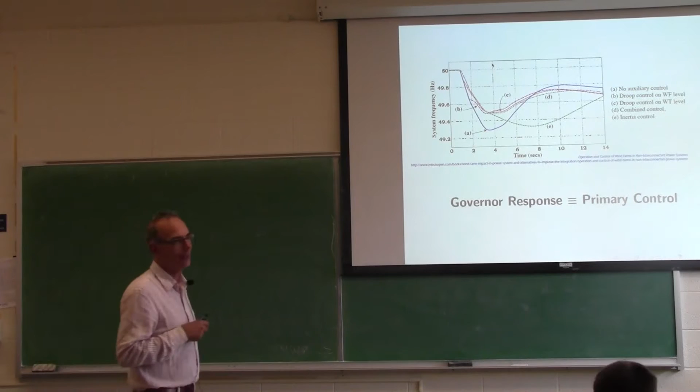Just a little bit about the need for secondary control, to motivate the lectures that come. This is something I thought about before and didn't explain, so I went back to look at it, and it's a good thing. There's no easy way to explain this, because it's a particular paper on how to deal with wind farms.

Everyone says because of a lack of inertia, which gives you that M we've been talking about, I'll review that in a moment, when you have a lot of wind and solar, you have a lot more swings in frequency when there's a disaster.

So these are simulations where there's a generator outage at a certain time, and with different control techniques you get different swings in frequency. Without any auxiliary control, you'll get one particular swing, and with their synthetic droop at the wind turbine level or the wind farm level, they brag about how they can reduce that swing downwards. And I'm sure they can do a good job with that.

You need some sort of way, you need actuation to do it. With a governor, you know what it is, you can turn a valve and supply more or less mechanical power. With a wind farm, there's no valve. So what do you do? Over the next month we'll try to problem solve that question: what do you do when you don't have a resource like a valve you can turn?

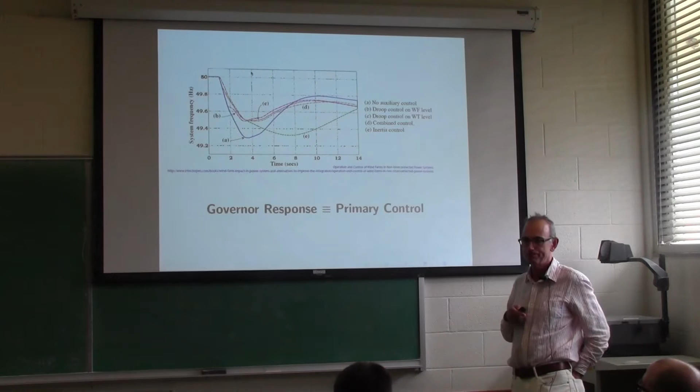So I've given you, I don't know why I'm repeating this, but when we came up with our power grid model last time, we're ignoring the huge transmission dynamics and losses and all of that. And we ignored the fact that there are some gigantic regions like the entire Northeast, and much smaller regions like ERCOT, which is islanded completely, a Texas thing.

Texas is one interconnected system. Interesting, Quebec is like Texas, it's islanded itself off from the rest of the world, although there are DC tie lines and all.

But this is what we've been talking about in the last lecture, that each generator works together, looks at local measurements to stabilize the grid. So you've got this distributed control problem. And as I've said, there's no science for that. You can't pick up a book on distributed control and learn anything, because there are no results.

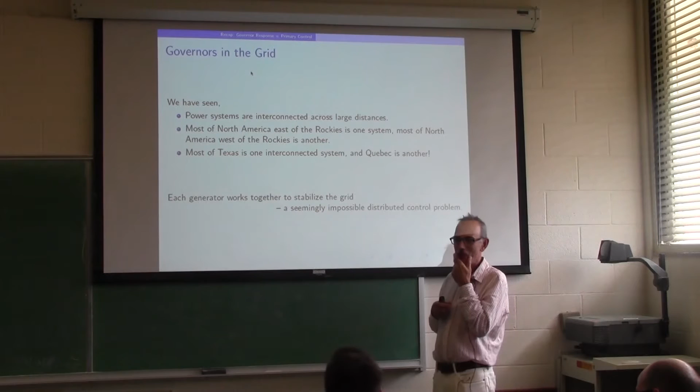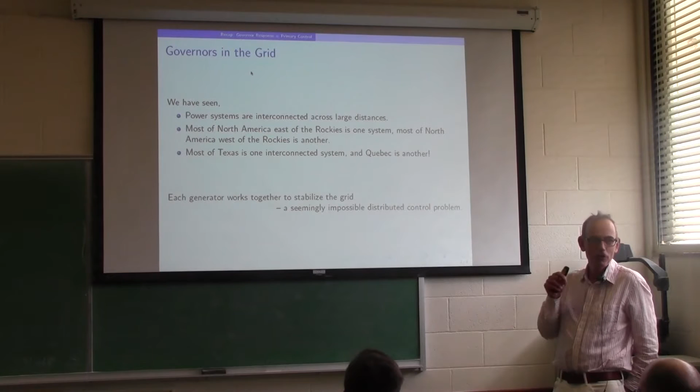There's nothing, just a bunch of counterexamples, a bunch of results saying you can't optimize. The complexity of computing an optimal solution based on distributed architecture is exponential, things like that, or NP complete. But there's no theory at all. So that's what's really cool: just by trial and error and monkeying around, power engineers have come up with this incredibly robust architecture, and we're just starting to see some explanations of why it works.

NERC demands, I saw, they've even made a bigger alert this year. Last year they were screaming about no more than 6%, 5% is good. They're worried about this because the dynamics of the grid depend on that. This is not because of steady state analysis, it's because it's this distributed control problem, and they're scared because we don't have any theory for this. You can see bad things happen and say our droop gains are too big or too small.

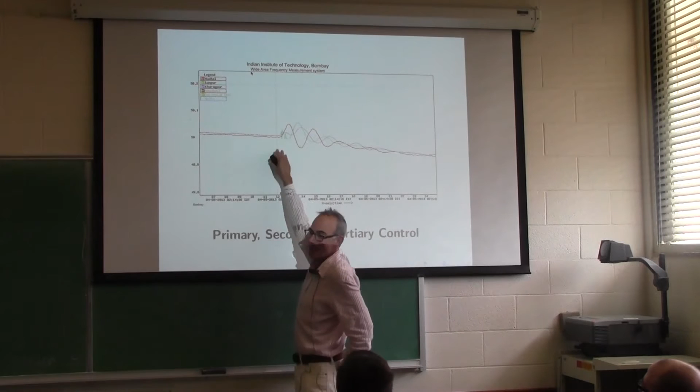Okay, so what we end up with is, first of all, we're going to keep talking about primary control a bit longer, we're almost done with that. And primary control is all about the beginning, trying to avoid crazy swings like this in frequency.

So this is it. India has the best plots because it's allowed to be more relaxed, the frequencies vary more. There's also a wonderful resource you can find on the website. IIT Bombay has all sorts of beautiful plots of disasters, just wonderful plots which are hard to find in other parts of the world. They happen everywhere, but India is very nice about sharing it. IIT Bombay is the best power group in the country, in the world. In India for sure, and in the world.

In terms of people hours, they have incredible people working on and who really care about that $500 billion. Did I mention this in the lecture? India, Arun's lecture, Arun Majumdar's lecture, he mentioned that India wants to spend $500 billion on renewable energy, and IIT Bombay is going to get a good percentage of that money, I'm sure, for research. So they're building big indigenous solar power plants so they can avoid buying solar panels from China, things like that.

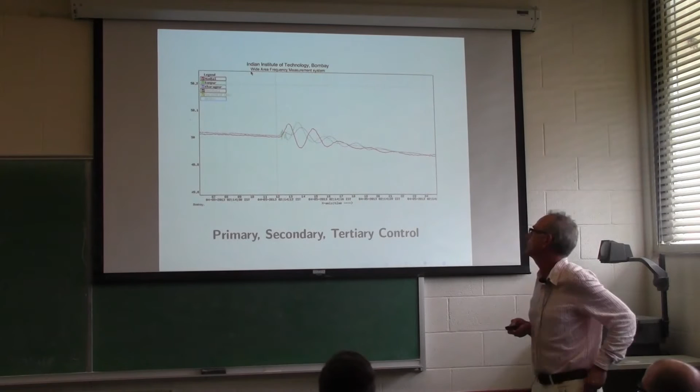So anyway, this is just the kind of things you see. This is sort of, again from India, where you see some crazy deviations in frequency - that might be measurement error - and the frequency going downwards, this is the kind of thing you'd expect from just primary control. Because remember, the steady state analysis said that with just primary control, if there's an increase in load or a drop in generation - say from a generator dropping out - the frequency will reach some steady state, and it'll be some new value.

So if you lose a generator, the frequency will converge to some steady state. This is the reason you need secondary control. But the fact that you don't get restored to the nominal frequency - in this case, well this is not 50 hertz - eventually 50 hertz is because this is before the secondary control kicks in.

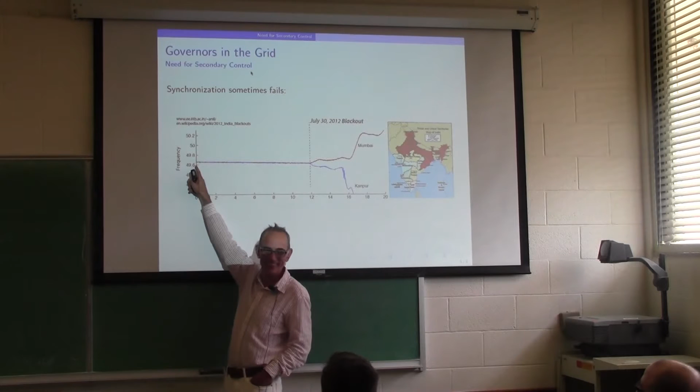And when things don't go right, when the governors aren't working at all, you get a blackout. And this is an example, just fantastic. And look what they accept as nominal - it's amazing, I mean it's usually 50 hertz, but it's amazing how robust it is compared to the US.

Okay, so we need responsive regulation. And again, given the state-of-the-art of distributed control, there's no science for it at all. It's a miracle, and I'm going to explain to you how it's not that surprising. Basically, the way this has been designed makes it easy to analyze. So there's no theory for, say, optimal distributed control, but the hack that power systems engineers came up with makes it easy to analyze. That's what's beautiful, and that's what you have to do. You've got such a complex system, you have to design it so it's analyzable. That's sort of a mantra, I think, in complex systems.

And that's what's happened in communication systems. At first sight it's insanely complex, but TCP/IP is this distributed protocol that makes it analyzable. It has no optimality features, it's a hack, and it makes a really complex system simple, at least in behavior.

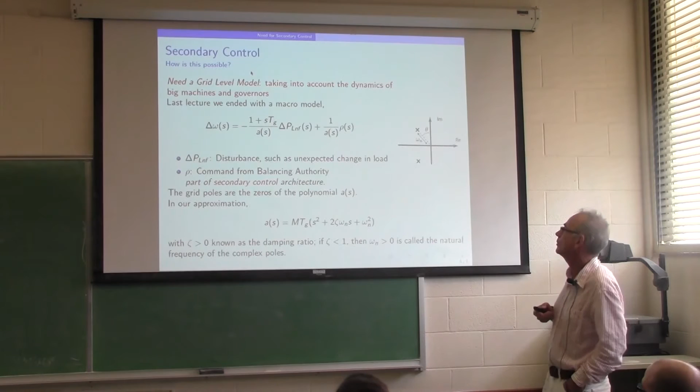So here's where we were last time. So now the equations come in.

So let's go through this a little more slowly. In terms of secondary control, restoring frequency to its nominal behavior, and using all the resources available - supercapacitors, batteries, demand response ideas we'll be developing, generators - in order to get any insight in grid level control, you need a macro model.

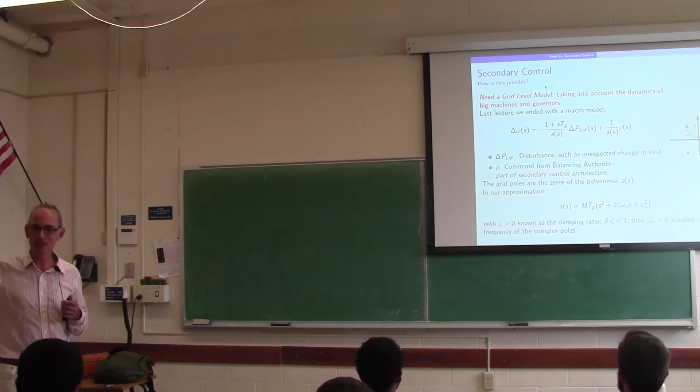That's why I started to. I was just giving you a plausibility argument in the last lectures, and this was the formula we came up to just as people were starting to push in and try to kick us out of the room. I won't derive this again, but go back, you've got the notes. I uploaded them online, and there was a transfer function here in terms of this ugly thing, which was the non-frequency sensitive load change in load.

So if that goes up, then there's a power mismatch. If it suddenly went up - more typically this represents a drop in load, or generation. The generator goes out, it's just like load going up. That's why there's a minus sign there.

And we found there's a zero in the transfer function from here to here. That's always going to happen, and not here. And I wrote 1 there - I guess that's a typo. I think I had a constant there, an M. I called it M last time, so that's a typo, I'll try to remember to correct that.

And A of S, in the end, I came up with a hack for that. I pretended it was second order, which is a reasonable approximation. We'll see. The beautiful thing is that's the Laplace transform of the signal that's sent by the balancing authority.

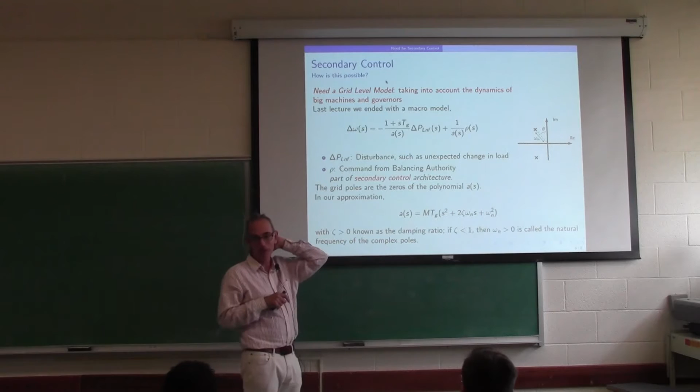PJM or Florida Power and Light or whoever, GRU, is going to send that signal to every generator, maybe scaled depending on each generator, and that's an input that's going to change their mechanical power, and thereby - that's broadcast to everybody - changes the grid frequency, right?

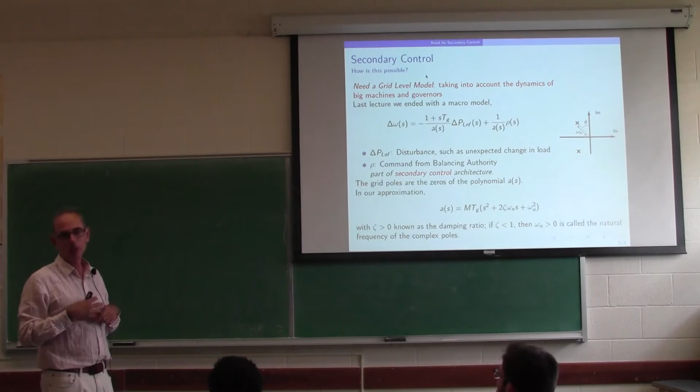Now that's the major architecture of the secondary control that we'll be talking about. The grid operator can play God and send a signal to all the generators. They're all doing their little thing, looking at the local frequency, but they're also looking at that signal which is sent from 1,000 miles away maybe, manipulating the behavior as well, but on a slower time scale - not in the order of seconds like primary control, on the order of minutes. So we'll have fun with this.

Again, so I argued that there were approximately this - if you take another course, you'll see there's pretty good arguments that you can approximate by a second-order polynomial. So that's a second-order transfer function, so there are 2 poles. And the approximation gave this, where TG was an approximation for a first-order term, and M was the sum of all the inertia constants.

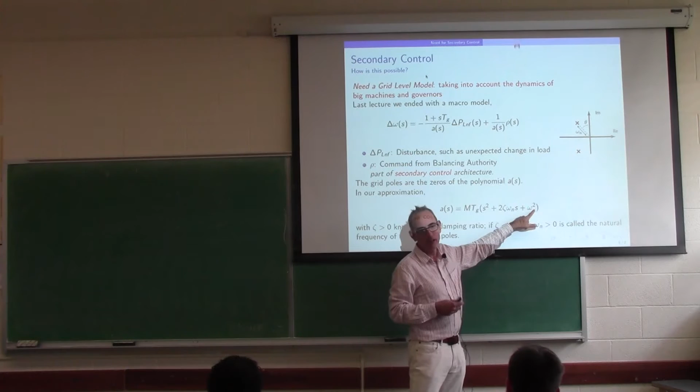This is what you learn in a control course, this representation - a way of describing a second-order polynomial. So this zeta term that appears here is called the damping ratio, and it's only if zeta is less than 1 that this term is important here. That has meaning, and then it's called the natural frequency, and I'll explain where that comes about. We really need to understand that, it's helpful. I'll explain it before we get to control.

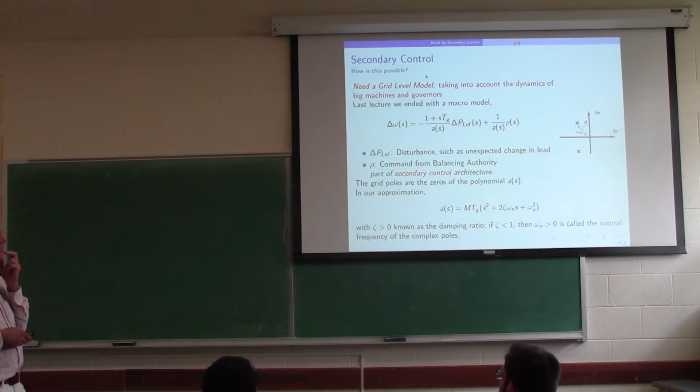Any questions? Was that all clear? Like I said, it was the most boring lecture ever, but we need it.

Last lecture, so there it is. Just tearing this apart again - if you go back, you can work these out. I gave you a formula for omega n squared, I gave you the 2 zeta omega n. They're in your notes, and they're horrible expressions.

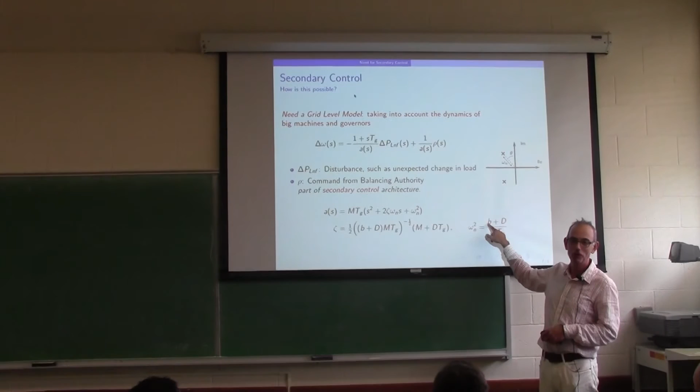And the omega n squared part is this times this - it's actually just B plus D. And if you recall, B was the summation of 1 over Ri, where Ri were those droop parameters. And there's the natural frequency. That's where we're going to see, when zeta is less than 1, that's when you expect to have big overshoots. So you might think that's what's going on.

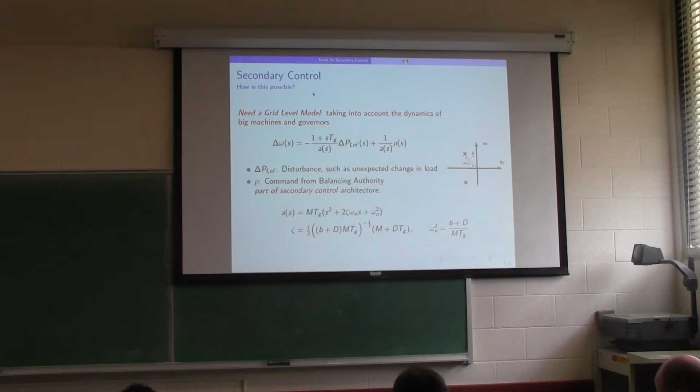Where am I? Yeah, I'll get back to that.

So let me explain this diagram. In the case where zeta is less than 1, this is what the two poles look like. They're complex. So that's why zeta less than 1 is important.

Everything has to be positive for the poles to be in the left half plane, which is necessary for stability. Even if you know nothing else, you need poles in the left half plane for stability—bounded input, bounded output stability. You better remember that. But zeta less than 1 is when you get complex poles.

And you have this nice interpretation that omega n is the distance of that pole to the origin, and zeta is equal to the sine of theta.

So if that angle is 0, that's when zeta is 0. And that's bad news—you get a pair of poles on the imaginary axis, and that's not stable. So zeta equal to 0 means a step response would result in oscillatory behavior forever. So you don't want zeta too small.

If zeta is very small, it's almost like you have a pole on the imaginary axis, and so a little jolt will cause big oscillations. These big swings in frequency would be a cause of zeta being close to 0 or something—it's not, I'll explain that in a minute. There's big overshoot, but it's not because zeta is small.

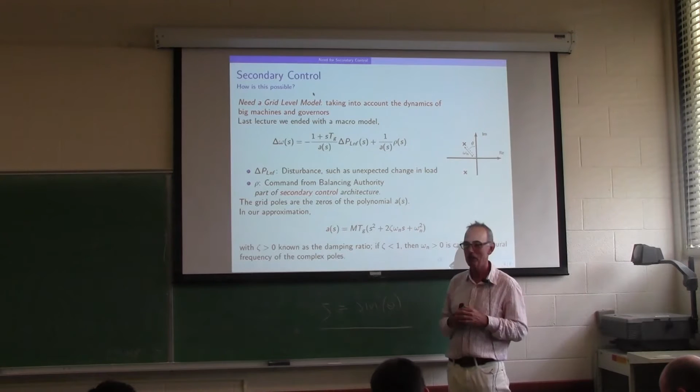All right, well, let's keep going. So here's what happens in real life. This is a simulation, but it's a really high fidelity simulation of what happens in real life.

So the WECC, the Western Energy, blah blah blah, I don't remember, doesn't matter, don't look it up. But anyway, it's a simulation of Western US. It's an example again of what happens when you have a lot of wind generation and low inertia or not, and you get different swings in frequency, not that different, depending on the mix of wind generation and traditional generation.

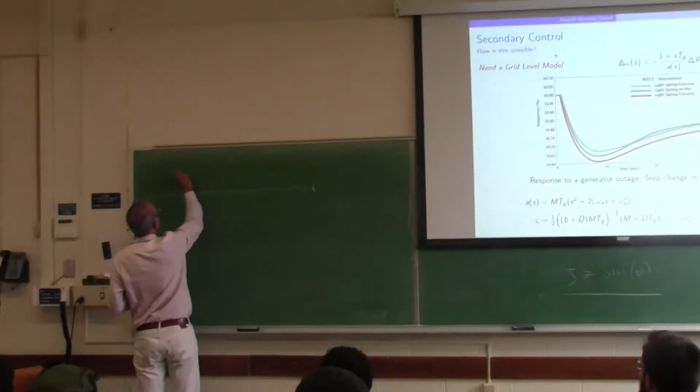Now, what's happening in this plot? Again, this awful notation, non-frequency sensitive load, which could also just be a generation outage—so it's either a load that's not frequency sensitive or a generation event. It goes along, and at time T naught, it dropped—

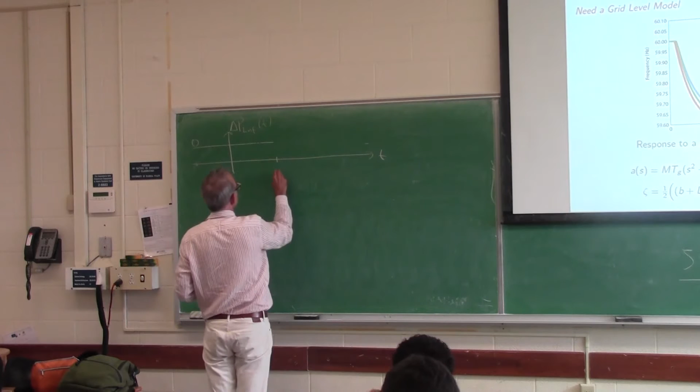Oh no, it jumped up—that's right, a generator dropped, which is equivalent to virtual load increasing. All right, so that's called a step input.

Now, we know that the transfer function from that signal to deviation in frequency—ignore that for a moment, because that's going to be at a much slower time scale—has a minus sign in front.

So basically if you look at delta omega of t, which is at 0—so that's not showing delta omega, that's showing omega itself. So subtract off 60 and you'll start off at 0. And what you're seeing is that at this point, first of all, do you notice the corner?

That's indicative of a zero. It's perfectly consistent with a second order system that has one zero and two poles. Exactly what you'd expect—it means relative degree 1.

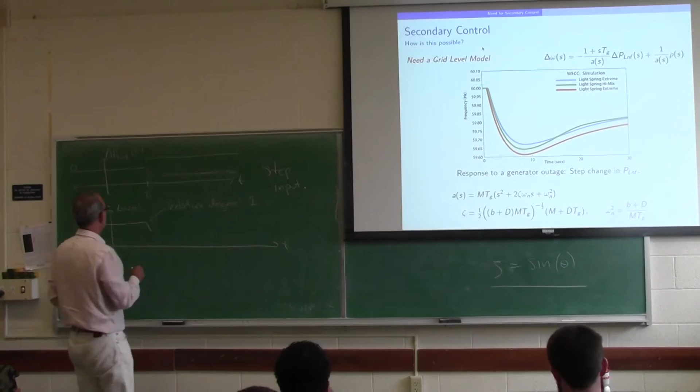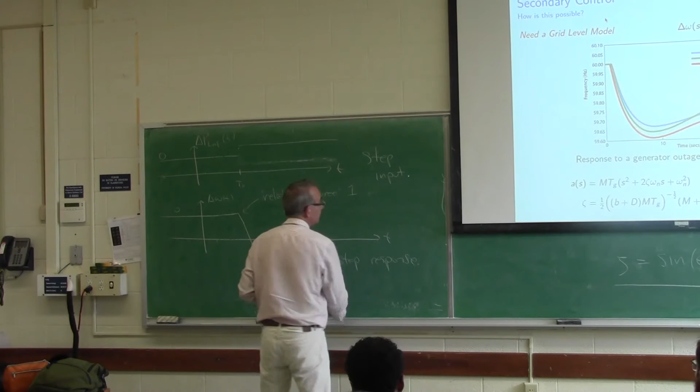Now step responses usually go up, but it goes down because of the minus sign. So this is a negative step response—negative, again, there's a minus sign there. So that's a transfer function.

That's it. So that's what's really cool—generators go out all the time, so we get to observe step responses all the time. And any control engineer looks at that and says, that's a second order system, I can fit a second order model to this. And for control design, it's perfect.

There's a typo in that. Oh, is there? Oh, that's right. Yeah, we'll talk about that later. There's a typo here, yeah, that's right. Anyway, I'll broadcast a correction later, it's no big deal.

So anyway, this is a high fidelity simulation of the Western U.S. You can see the same thing happening from real life—I've shown you a million examples of this from real life. And here's an example from a professor in Texas, Ross Baldick, who's a friend, the main guy for power in Texas, really, who did basically what we did. He computed this, as a lot of people have—this is an old thing to do.

And by the way, I've left things out. The big spinning machines aren't just generators. There are loads that are big spinning machines too, so you have to throw those in as well.

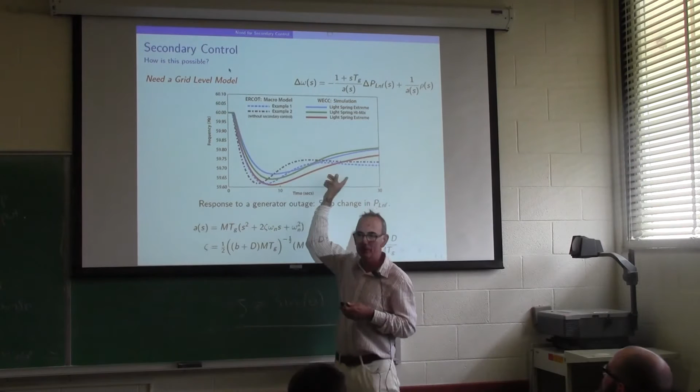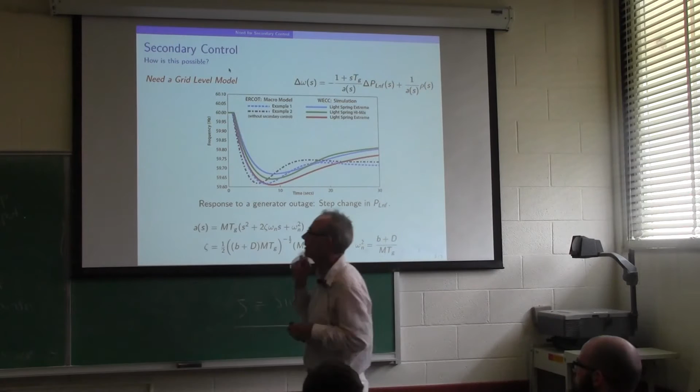Well yeah, we know that, right? We know that the steady state is - so delta omega infinity, the steady state, you have a formula, right? It's equal to minus delta P, L, F infinity divided by, do you remember? It was D plus the sum of one over R. Yeah, I think that's the formula, and that's what we got.

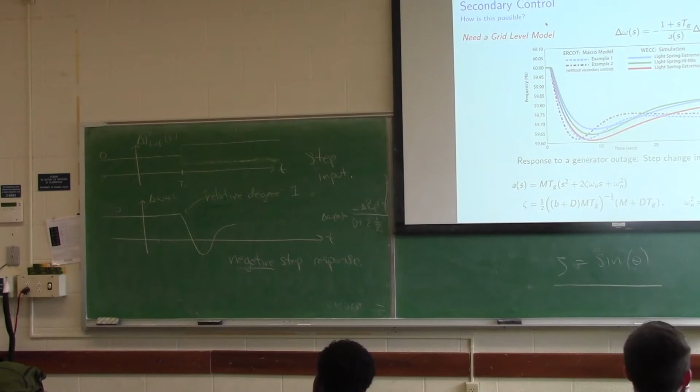So the larger this is, the more it'll sink, and that's scary. So you lose like a 1 gigawatt plant, or the 2 gigawatt plant that we saw in it was Indiana. Holy shit! That's amazing. That's 5% of the load in the Midwest.

So, all right, cool. So anyway, the thing is, it matches reality. I know these are both simulations, but you've seen real plots as well. It looks like a step response. So we're in good shape. And so this is what the grid operator needs.

So if you know anything about control, if you're going to build a flight control system for an airplane, and somebody gave you a model they used for simulation, you would laugh in their faces. It would be so complex - a partial differential equation of 50th order in 100 dimensions. And you'd say, what the hell am I going to do with that? What you do for control design is you say, give me a second order model. I don't mind if it's 10 dimensions, but give me something simple. I can design a control system based on the simple model, and then you can do numerical experiments on your fancy PDE simulator. You can't do design based on a complex model.

And that's the hardest sell of this field. People will not accept that. People who don't know about control theory, you go and try to talk to them about that - I need a simple model for design - they won't let you talk to them. It's so frustrating, in so many different fields. They don't understand the abstraction, that you need a simplified caricature of reality to get insight and get initial control strategies.

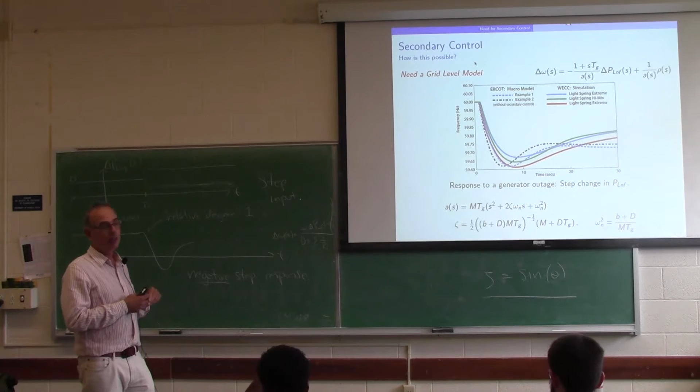And later on, when you do the simulation, sometimes you find issues, like in Droop, this weird deadband. So you actually don't do anything with Droop, really, until the frequency gets out of a deadband. It's not really linear - you only kick in that integral control when the frequency goes out of some small deadband. And I guess there was some chattering that they saw, and so they put in the deadband to resolve that. And you wouldn't get that from this model - you need to go and get a high fidelity simulator to do that.

All right, okay, so this is how you would do a design. And the thing is, for secondary control, the dynamics are so simple, you can get away with murder, I really believe. I think people talk about much slower time scales - I don't think the dynamic issues are as critical as they are in these time scales of seconds, where you can just blow up like that in a few seconds. But on the order of minutes, I think really simple models can be used.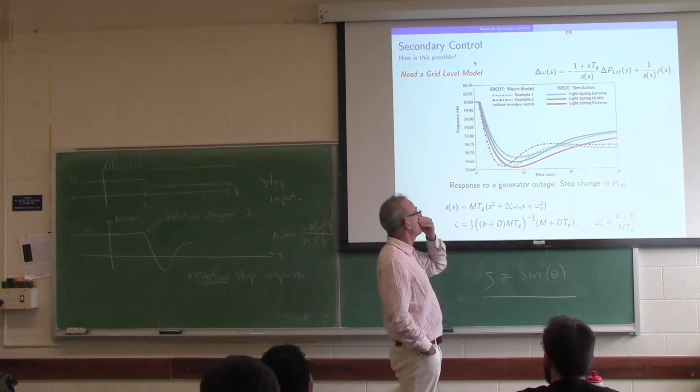It's my conjecture, okay? I might be proven wrong someday, but most people in the power systems community agree with that. Who knows what's going to happen when we make so many changes to the grid? I have intuition from reading books and seeing plots like this based on the current grid. What if we got rid of every traditional generator? We don't know. So I could have false intuition, but if we don't make major changes, what I'm saying I'm sure is true.

All right, what's next? First of all, let me explain this. I'm going to kill this now. Any questions on this?

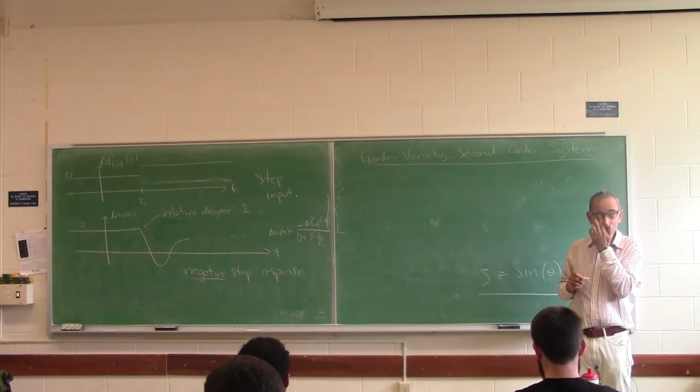Okay, so it might be ambitious, but I want to do a few things today. First I want to just explain to you about dynamics of simple models, just to get some insight. And then I think I can do it. I think in 1 hour I can teach you everything you want to know about classical control. And if I'm wrong, we'll go a little longer. But I think the main idea is you can explain really clearly in 45 minutes.

So that's a normalized transfer function like this. So no zeros, and I've made a change here. I've made a normalization. And why would I put this funny number on the top?

Any guess? Constant m? Well, not m, but there was some funny number here before. I had a b, which I could write down. Before, it had nothing to do with this. They weren't related in any way.

The reason for this is, note when I put an s equals 0, I get 1. So there's a DC gain of 1. So it's just a normalization so that if you put in a step input, the steady state will be 1. Okay? So if you look at H and you have some input-output behavior like this, I'm going to keep that in there.

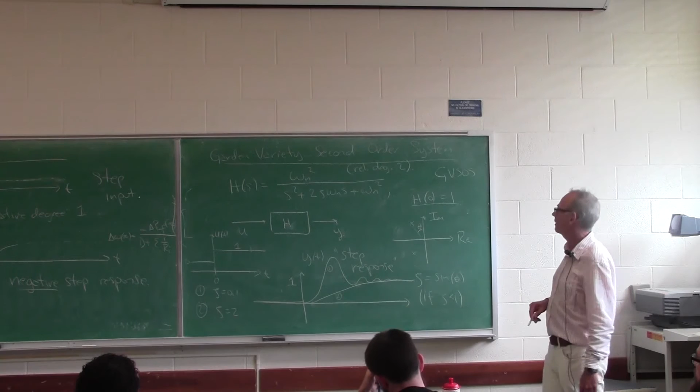And again, if I don't have room to put it in, but if zeta was 0, it would do this, and it would just be a sine wave eventually. It would converge to a sinusoidal behavior if zeta was 0. If zeta was 0, you'd have poles there and there. So it would just be like a perfect slinky. Pump it, a frictionless slinky. Just hold it and boing, give it a little kick, and it goes boing its natural frequency forever.

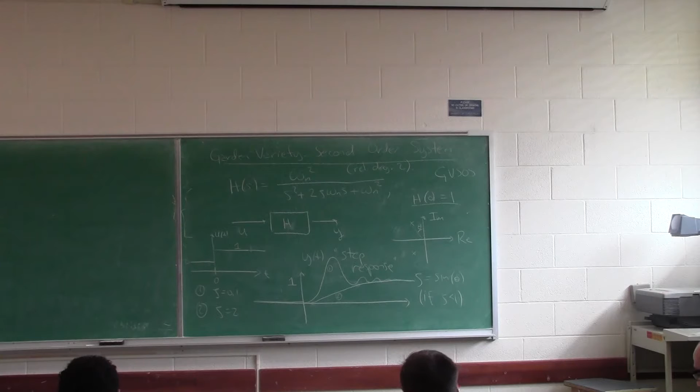All right, so why do we see this here? So that's the case of no zeros. What if we had zeros? Let's give it another name. Let's call it G of S. I don't know.

Okay, so we found that when we got the response from disturbance to frequency deviation, we had this behavior. We had a constant here which was positive, which means we have a zero in the left half plane. Okay, so now we've got exactly the same picture, but we plug in a zero.

When you look at it like that, you say, what the hell can I say? You could say some things. I mean, if tau is very, very small, you can imagine it's almost like that's not there, but way out in infinity, it's sort of like not there. But if tau is big, that means the zero is more close to where all the other action is. Then that's very different. But let's give this a different name.

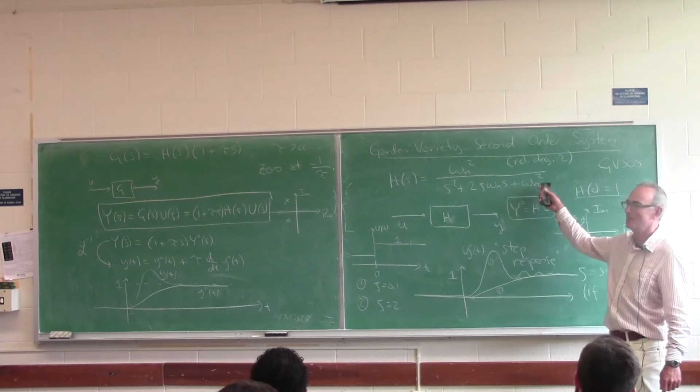So that would be the first two weeks of a first year control course. They spent a lot of time giving examples of DC motors and playing around with dynamics, and you'd look at other state space models based on this, things like that.

In terms of equation, what is y naught of t? Oh no, nothing, I mean right there. I'm just saying, suppose we first start off with a system, the differential equation. I mean, we know that, right?

Oops. Yeah. Oh, that's right.

Okay, so if I unravel that equation, I'll get that equation, because this equation is exactly the same as what we had before. Right, and so then you go through and you again do the same thing. You take inverse Laplace transforms, and you get y double dot plus 2 zeta omega n y dot plus omega n squared y equals omega n squared times u plus tau times u dot.

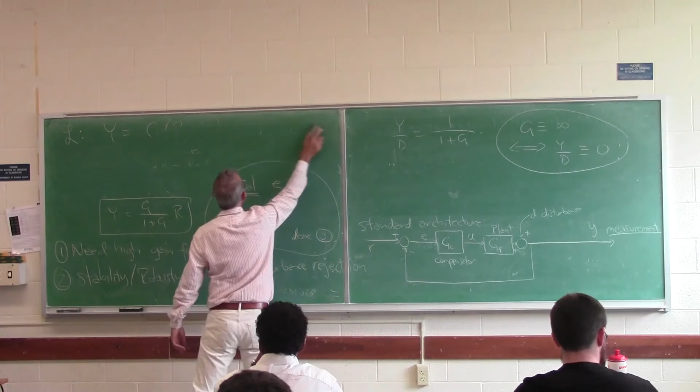So to achieve these two goals, you can't achieve this—you have to relax your goal. These are now two goals: we want tracking and disturbance rejection, and we want stability and robustness. To achieve this, we have to relax what we mean and just say, in some frequency range, we want really good tracking. So this relaxes our goals.

So like we have this transfer function—I'm sorry, I'm going to have to write Bode plots. All right, so E was, remember, E was R minus Y.

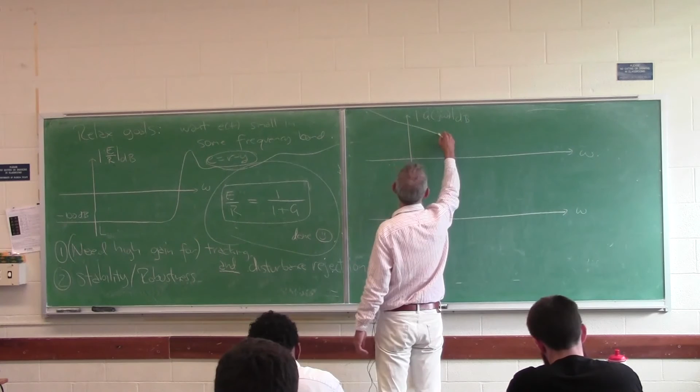Typically you won't see this because it would mean you have a big static value constant for a long time, which isn't what you typically see in practice. What we typically see is huge values at low frequencies, and then maybe something funky happens where it flattens out, goes down, and maybe goes down really fast. That's a magnitude plot in dBs.

Now the phase is important. I'll show you what typically happens: you'll have phase equal to minus 90 degrees here. We'll see that's what happens in almost every application where regulation is the goal. And then it typically decays. Now this is a bit scary.

This is a really scary system, where the phase goes like this. In real life, you can't measure things like this because the magnitude here is already 10 to the minus 10. I challenge you to look at a sine wave with magnitude 10 to the minus 10, when it's normally magnitude 1, and measure its phase. So these things, this is not even measurable, so it's not even reality.

But let's say that's minus 90. Let's say that this is minus 180. And let's pick some other stipulations. Let's put a number here.

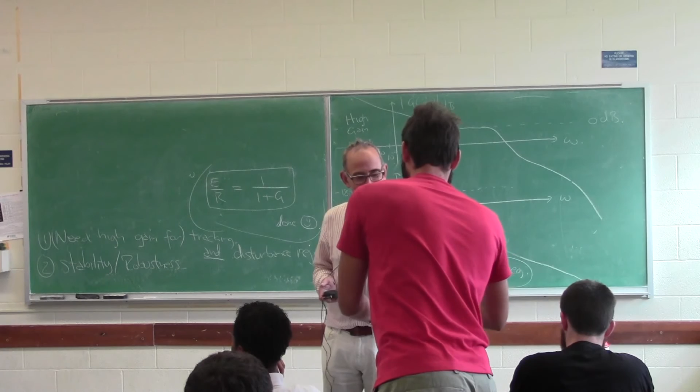It really is, it's flashing. All right, so we got some life here. Okay.

So the danger is that it looks like maybe there's a pole at j omega naught, you know. It's possible because 1 plus a negative number can potentially be 0, and that's a pole. So the only way—a pole means that g is minus 1. Right? And so g could be minus 1. And there's the red flag.

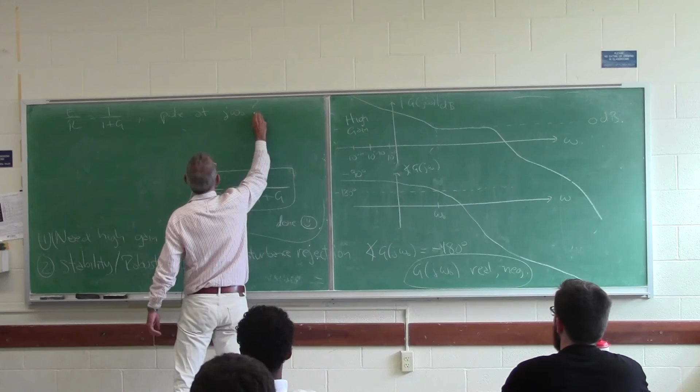I mean, it's hard to see here. It looks like we just missed it, you know, but we don't know. We came up with this transfer function based on the arguments I gave in lecture, and then based on some least squares. So the magnitude, the question mark there, and the answer is yes, if the magnitude of g of j omega naught in dBs equals 0, because that's a log in dB, so being 0 is the same as unity. And it's not, but according to this plot, it looks like it could be very small.

That's called the gain margin. And basically, if that's very, very small, then a very small bit of modeling error, and you actually have a pole on the imaginary axis. Move it a little more, you're going to get poles in the right half plane. You'll have instability. This is a really big concept—this is a central concept of classical control.

It's for understanding that boundary, see? Why are we obsessed with the imaginary axis? Because poles in the left half plane are stable. One pole in the right half plane, it's unstable. This is the wall between stable and unstable. And so you want to protect that wall, you want to build that wall and protect it. I'm not quoting Donald Trump.

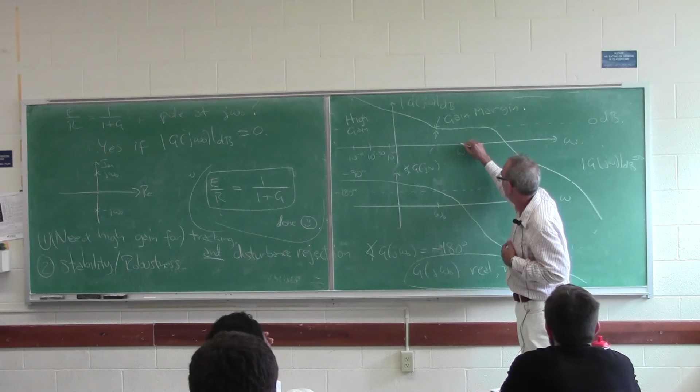All right, so that's called the gain margin. The other thing is called the phase margin. You go back here, let's call it omega 1. So we go way over here at omega 1, that's where the magnitude actually is model exactly unity, or 0 dBs. And you go down here, and see how far you are from minus 180. That's called the phase margin.

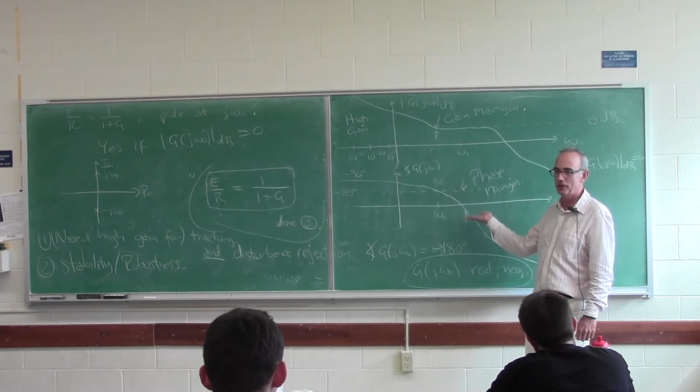In this example, it looks like I've got lots of phase margin. That's 90 degrees, that's 180 degrees. My God, you don't see that in real life. It means I could have incredible uncertainty in the phase and still have stability. I won't have this issue of a pole.

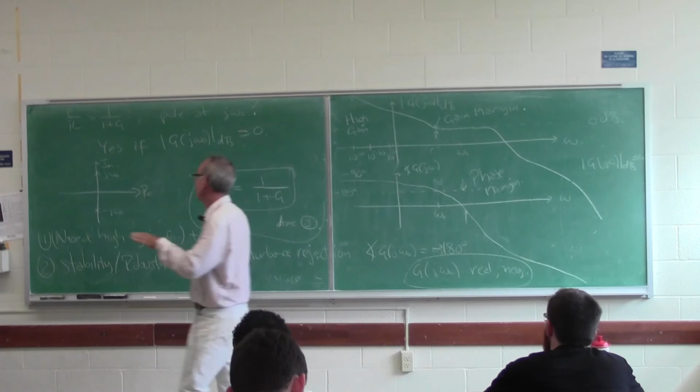Why can I be so flippant? It's because if you tell me the system's stable, under perturbations it'll still be stable. If I perturb it, the poles will change. Stability means the poles are in the left half plane. If I perturb it, they'll move around. If I perturb it more, they'll move more. If I continue, at some point one pole will go from the left half plane to the right half plane.

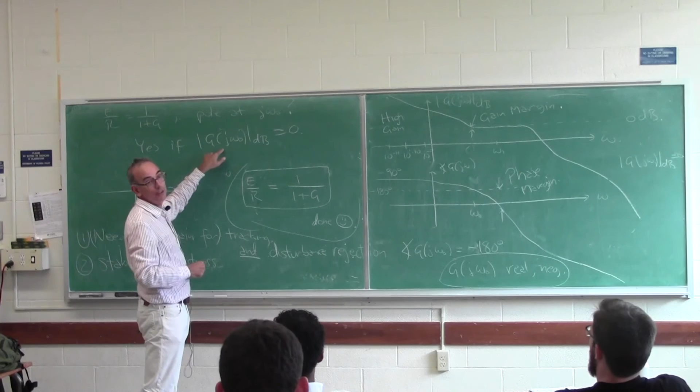But if I do that perturbation continuously, there's a wall there. It has to go hit this wall, right? So as I perturb, if you tell me it's stable, I can drag this all around continuously. And as long as I don't ever have this horrible condition where the magnitude in dB is 0 and the phase is minus 180, I know my perturbations won't have destabilized the system. It's a beautiful way of thinking. And this could be an infinite dimensional system, a PDE, and the logic still goes through.

You want that to be big. You want a big gain margin, and you want a big phase margin, especially if there's uncertainty in the plant dynamics, which is typical in the power grid.

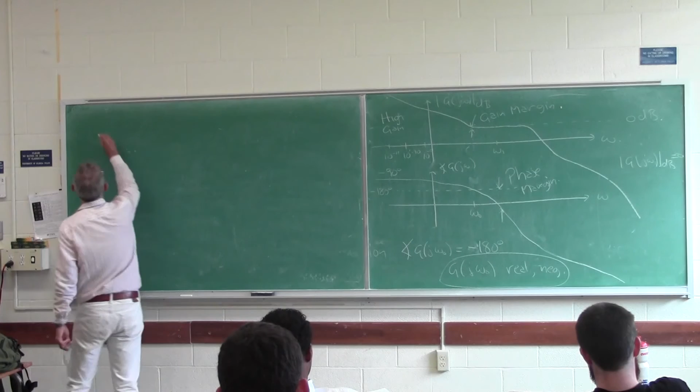So, one caveat, I just realized this one thing. Well, it doesn't matter. I'm going to say this.

Remember, the goal was to make G big at low frequencies. The plant is something we can't do much about, so it's the compensator we're going to crank up. And what's a transfer function that's big at low frequencies?

Low frequencies means, for example, DC. Can you give me a transfer function that's infinity at DC? Yeah, 1 over s. So if I want infinity, there you have it. At DC I have infinity. So having infinite gain at DC is a piece of cake. But we can put a gain in front of that.

I'll call it Ki for integral gain. But I can always add other stuff as well, and I could add more terms. Should I? Oh, I guess I will. It's almost never done. This is called a PID compensator.

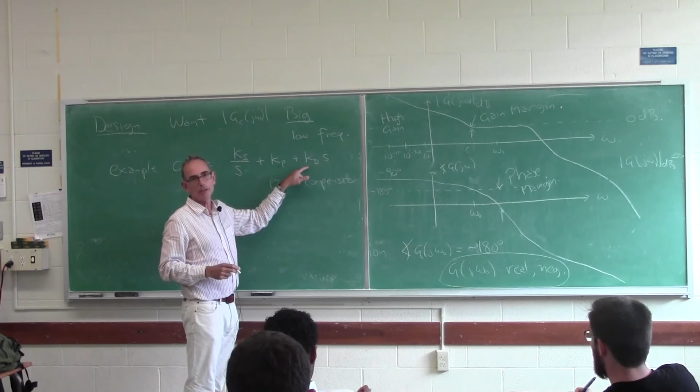It's really rare to keep this last part in, so PI is more common in practice. And the reason is, remember what this means: this is a filter that takes E and filters the error signal to get U. So if you take inverse Laplace transforms, dividing by S is integration.

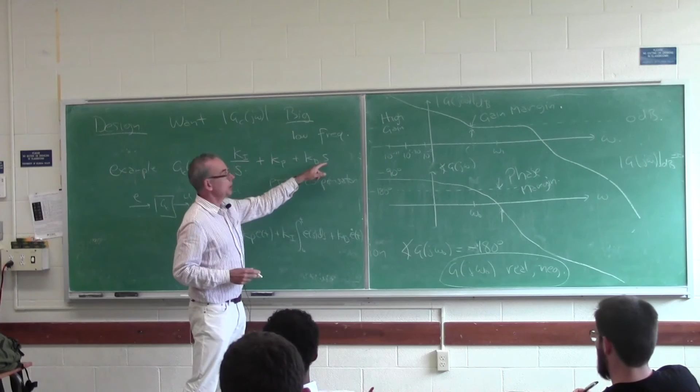Let's do this first. Since it's PID, let's do the proportional part first, so it's just a gain times E of t. And the I part, then it's Ki times the integral. And then KD, so multiplying by S, as I mentioned before, is differentiation.

You can imagine in a lot of cases this is noisy, and differentiating it causes all sorts of problems. So there's much more clever ways. Now this has a role for stability, but there's much better ways to deal with that, so we're not going to talk about that in this class.

We're going to just look at PI compensators in this course, and that's all that's ever looked at in the power industry. It's amazing.

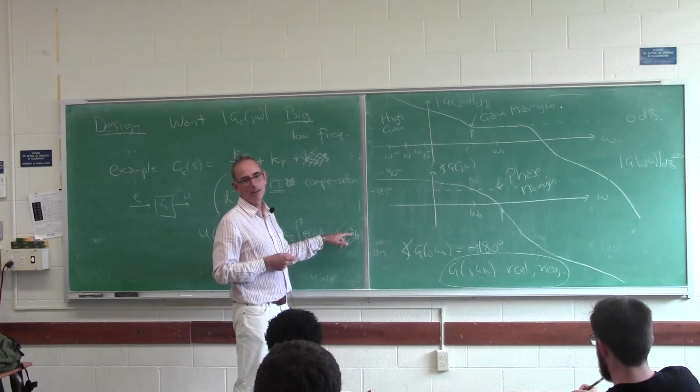No, the differentiation - the high frequency noise can be increased, right? Yeah, if E had discontinuities, you get infinite values. It's just that noise gets amplified. So there's better ways to do this, but that's a control course, and it doesn't arise in this subject.

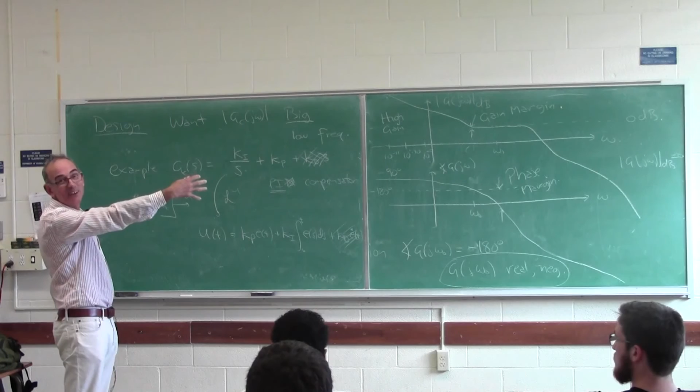In power systems, they are so risk averse, the models are so uncertain, that they really are conservative. You only need the derivative part if you're trying to be more aggressive - something like this you'd have in high-performance aircraft, where you're really trying to make the bandwidth huge. So they go for lower bandwidth in power systems because of so much uncertainty.

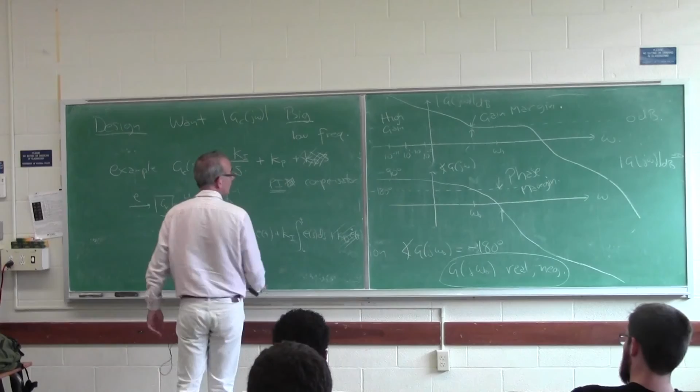All right, so let's do it. Cool.

Okay, so our grid transfer function, let's do it. Let's control the grid. We have a grid transfer function. Forget the minus signs, we'll get rid of those. Remember I introduced an EW so I wouldn't have to have that minus sign, so throw away the minus signs.

If you look at our model, it is really boring as hell. So this, I don't know what it is, I don't care, because I'm going to annihilate it with this monster. As long as this is not zero, as long as this is not minus infinity, which would be 0, I'm happy, because I'm gonna kill it with this.

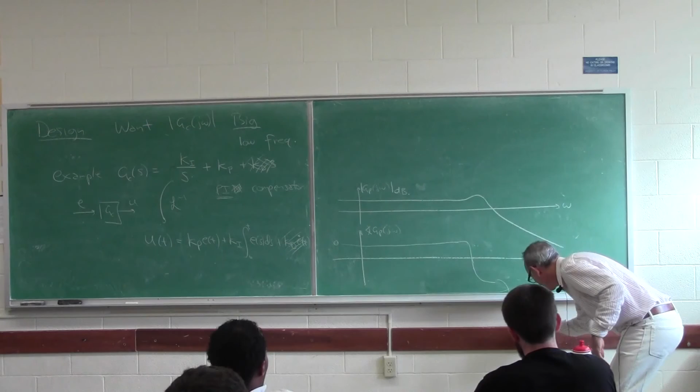Remember we ignored the valve dynamics? Remember we ignored blah, blah, blah, blah, blah? If we put those all in, it would start to go down, and it would settle off at minus 720 or something. So our model was reasonable up to here, and that's it.

Now it turns out what's really lovely is that this time scale is like, if you think about the frequencies in this range, they're like sinusoids with period of a few seconds. So let's say around 10 seconds maybe, or something. I mean, maybe 5 seconds, something like that, right? So there's a lot of uncertainty here.

I don't know exactly where this hump is. I don't know exactly how big it is. But it's on these faster time scales that, luckily, I don't care. I'm just gonna run away from that. So there's uncertainty here.

And there's phase lag, meaning negative phase. And it's negative phase that scares me. So we'll just stay away. And that's what's done today in the grid, and that's what's done in every application. If you've got a lot of uncertainty in dynamics, you cut it off.

So remember, I can crush the gain if I want to. This is GP, not, I can play around. All right, I have to erase that. I want to put this all in one thing. All right, so...

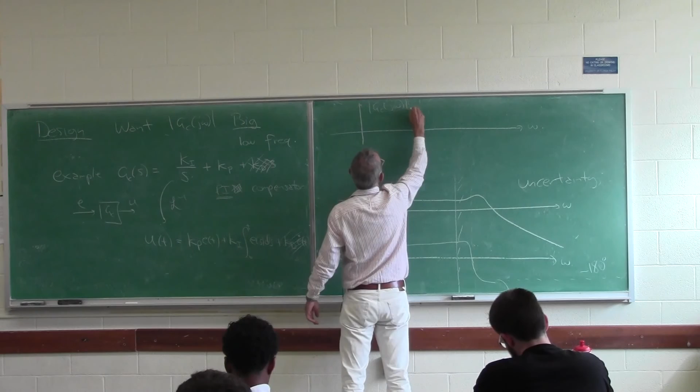Okay, so remember, from now on, that's not an example. This is us. This is PJM, or ERCOT, or anybody you want. This is it. We're going to use PI compensators. That's my definition of a compensator for the next weeks.

So what do we want? This gain, whatever it is, it's not big enough. I want it to be big. I want it to be really big. And I do that by throwing in this pole at the origin.

And so, remember, we're looking at G of J omega, where omega goes from 0 to infinity. We never really get to 0 because it's a log plot. If the frequency is very small, this thing totally dominates, and this is insignificant compared to it. So it's just, if you actually plot it, it's really just a straight line.

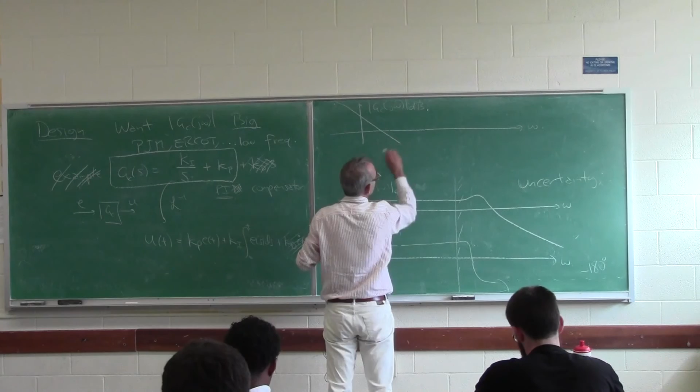That's for low frequencies. But when S, which is J omega, is very large, this goes to 0, and this dominates. And so you end up getting just a constant.

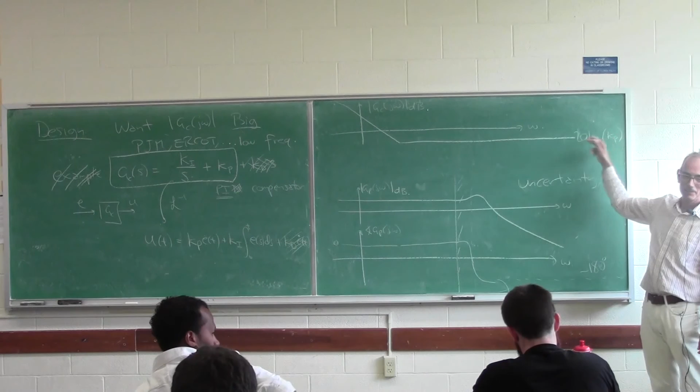I never defined dBs, I'm doing it now. So this will eventually settle down to the magnitude of Kp in dBs. And this corner, the middle frequency, is a place where these are commensurate, which is actually minus this over this, the ratio.

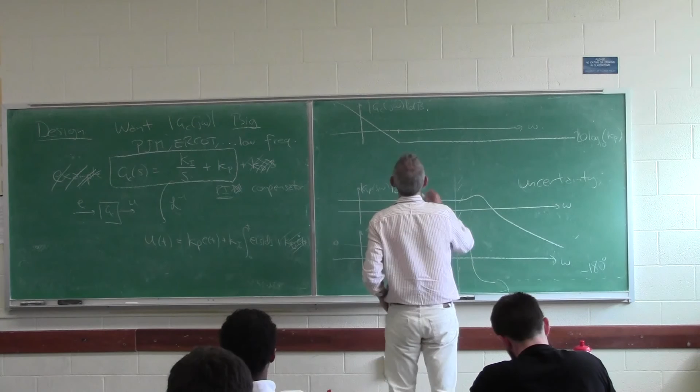It's K. Oh no, but this is positive frequencies. It's Ki over Kp. Yes. And you're right, I should say that.

So when you look at the poles and zeros of a PI compensator, you're introducing a pole at the origin, and you can check it out. You're introducing a zero at exactly minus that location. So the zero is at minus Ki over Kp. Right.

And in some control applications, the location of the zero is really important. But here, we're going to see it's not that important, maybe. We'll see. And that looks bad, though. God, you guys have all written this down? I did a design just now without knowing it, and it's going to be a really crappy design. And you guys can all tell me why.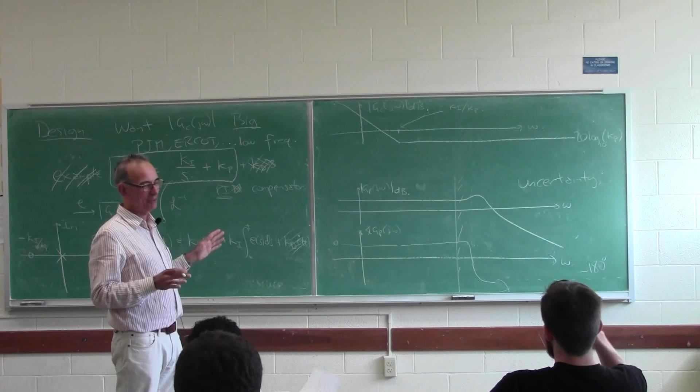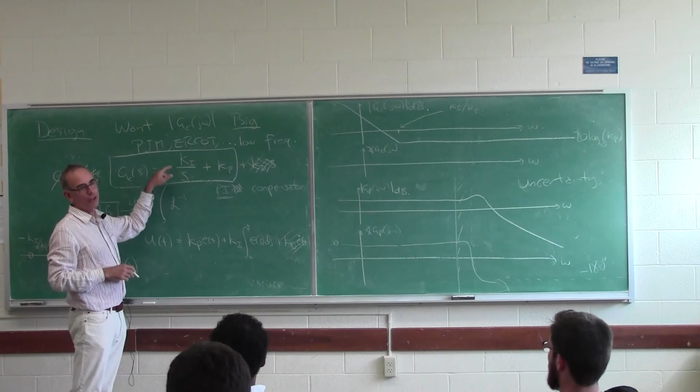So the same arguments go for the phase. If you put in S equals J omega, 1 over J is minus J, and the phase of minus J is minus 90 degrees. And this is huge compared to that, so you get a phase of minus 90 degrees.

And you can come up with very, very nice heuristics.

And there you're done. So this isn't a good design. No, I don't like it. I don't like it. But let's think about why.

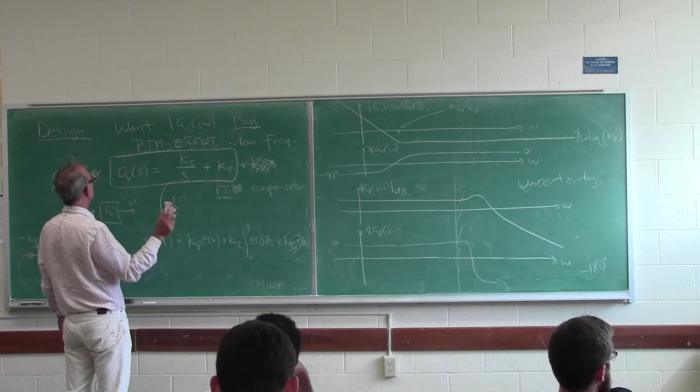Yeah, we'll definitely need another lecture for this, but all right. So.

So I said that there's a lot of uncertainty here. I'm definitely going to suppress the gain a lot. I don't want to accentuate the gain a lot here. Well, I won't, I guess, because the magnitude is decreasing. I guess I can erase all this.

Okay, so when you look at the products that we care about, and logarithmically when you look at that, you look at the sum of the two. So what I've actually done is I've made it, instead of being flat here, I've made it decrease. And then I've made it flat for a long time, because that's just the natural dynamics now, and it comes down. All right? And then I've got the phase.

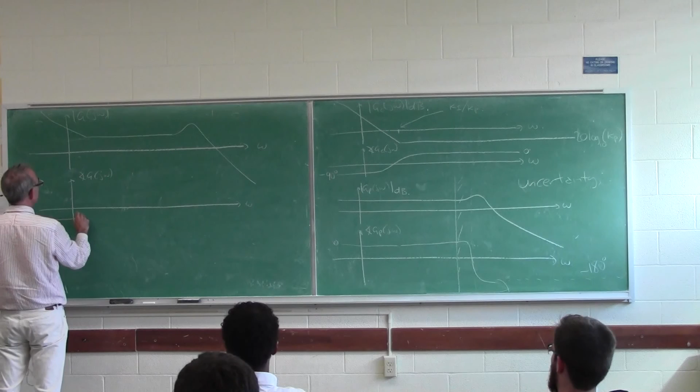Which I said is minus 90, and then it comes up. It's going to be flat a while, because the phase here is 0 and the phase here is 0, but then it's going to come crashing downwards.

All right, so why do I not like this design? I could have maybe done better. And the question is, remember I was obsessed, say, let's just look at where the magnitude is 1.

So remember, this was a critical point. If the magnitude is 1 and the phase is minus 180, I'm in deep doo-doo. So it could be that omega 1 is there. But that means that's 0. That means the magnitude is 0 all the way around there. That would be really stupid, because the magnitude would be basically, I wouldn't know where the crossover frequency is.

It could be anywhere here. So that would be idiotic. All right, because it could, who knows, maybe it would get into this region.

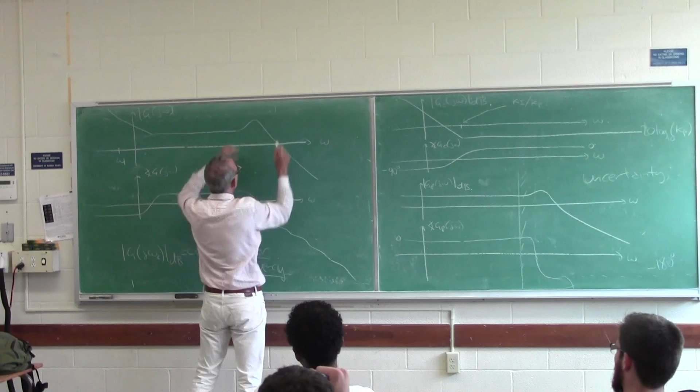Okay, so if I did a good design, my omega 1 is probably over here. And that's so that I can suppress things, you know, where the, and especially suppress that resonance, where I know nothing about the system. So this is by design.

That's going to be 0 dBs. So I know that for stability and robustness, right over here, that's minus 90. Well, it's not until here.

So that was an important thing. I mean, I don't know where this is exactly. I want to suppress this. And so I know that I'm going to design this so that omega 1 is over here.

All right? So why is it a crappy design? So remember, this is 0.

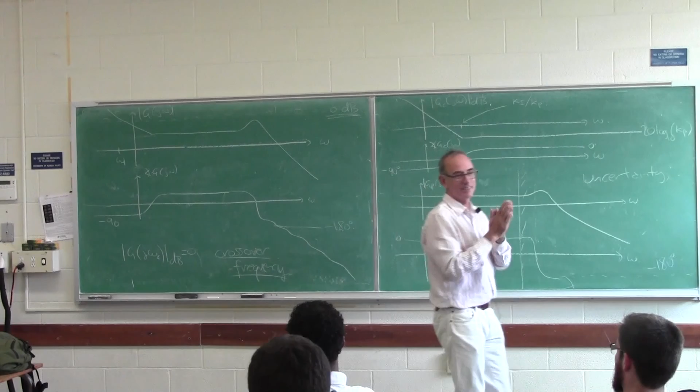Well, I've got high gain. You know, it's blowing up, right? I mean, so anytime you use a PI compensator, you've got infinite gain at DC. But you're on the right track, because this keeps going, right?

I mean, I can't go forever. Or maybe it's a log scale, so that's 10 to the minus 10, 10 to the minus 11, 10 to the minus 12, 10 to the minus 13, 10 to the minus 14, you know. And that slope is linear, so it goes to infinity.

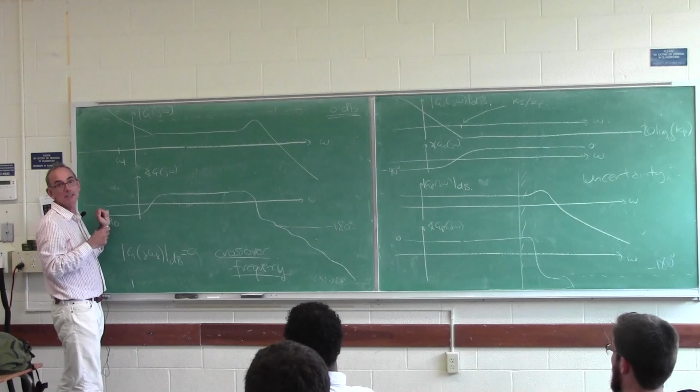But why am I wasting all this bandwidth? You know, I mean, I'm going to have high gain at very, very low frequencies, and I could do a better design. So we'll do a better design next time. But so I've got stability with this design, but it's a very low region where I have high gain, very, very, very low frequencies. So we need

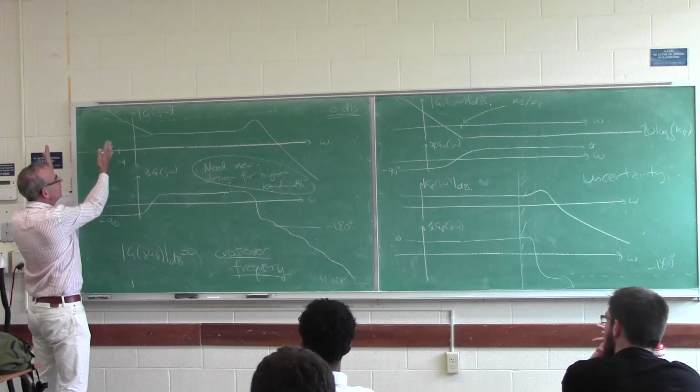So higher bandwidth means a larger region where my error is 0. So here it's going to be only when the gain is large. Well, that's 0 dBs. It's a frequency range way over here. And I mean, I don't know what these units are, but it looks like it's really far from.

I could do much better. All right. So we'll think about how to get a better design next time.

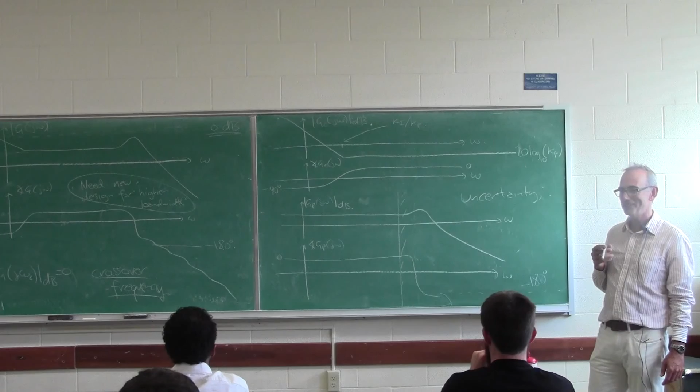No? Okay. So it can be done. Classical control in 40 minutes. I mean, not without homework. You gotta do a problem. So I'll cook something up.

Cool. Until next time. Oh, I know. Oh, you all look expectant.